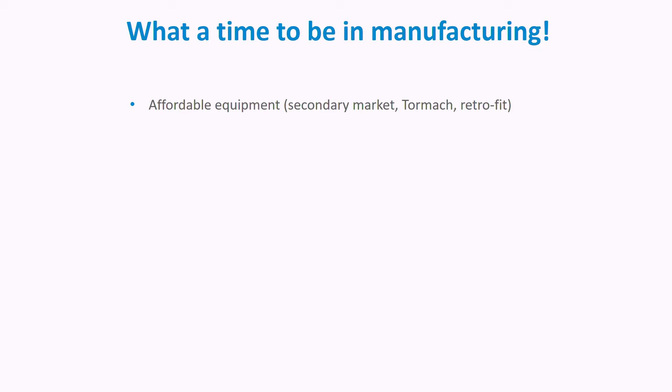I don't believe there's ever been a better time to be in manufacturing, personally. The cost of equipment has come down dramatically over the last 10 years. Used equipment can be had for less than the price of a new car. You can buy a brand new machine for the price of a new truck. Haas makes some really great entry machines. Retrofits, Tormach, Syil, all these different small companies are popping up offering better availability and pricing.

The same thing goes for tooling. It seems like every other day a new cutter manufacturer is popping up offering something better for the same price or less. Work holding, tool holding, those have all come down in price.

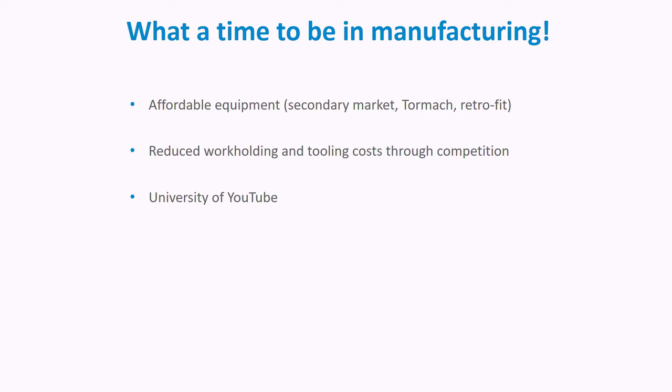University of YouTube. My generation would get out of high school, go into the shop, or go into trade school, get an apprenticeship, and work their way up the ladder. Now we have white collar individuals making the transition into the blue collar world because they have that creativity to make something. You have John Saunders with NYC CNC putting out wonderful videos on Fusion and machining. You have Lars Christensen from Autodesk doing live YouTube streams. So you have no shortage of information, and you can learn something very quickly.

Software. One of the biggest hurdles I experienced when I first wanted to start a shop was I couldn't go out and spend ten grand on Mastercam. I could get a pirated copy, I could go with BobCAD, but legal issues and quality issues made that impossible. I wasn't about to spend my entire savings on a piece of software. So when Autodesk put out their Fusion 360, it was a dream come true for a lot of small shops and people with the desire to do something.

And I certainly took advantage of that. It's free for hobbyists, free for startups, free for students. If you want to buy the version because you don't qualify, it's $300 a year for the basic version. Most people spend more than that on Starbucks in a year, so the $300 is chump change.

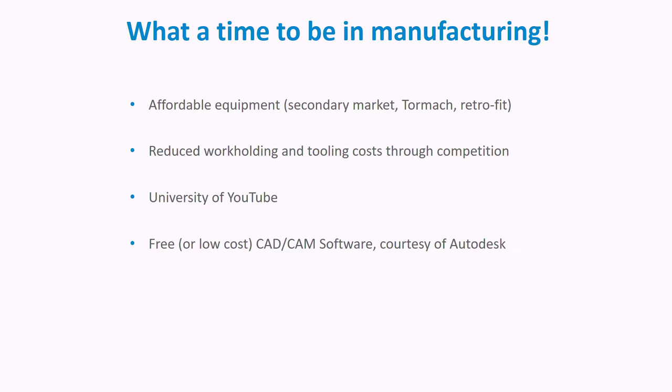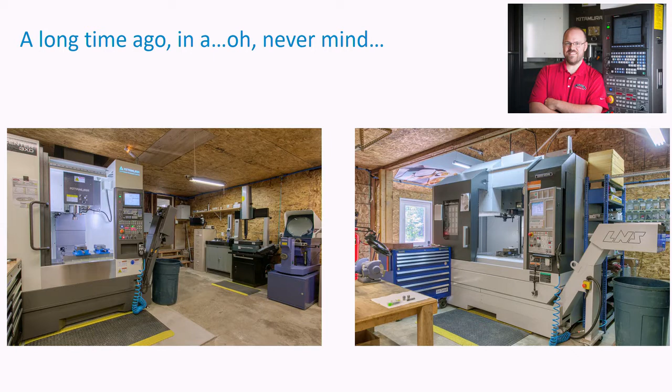Before we get into the meat of the topic, though, I'd like to give you a little bit about myself, where I'm from, to explain why I feel qualified to talk on the issue of quality and integrity. My name is Seth Madore.

I'm from Maine. I've been a machinist for 18 years. I was one of those that got out of high school, went into a shop, pushed brooms, made parts, made junk, made a lot of junk. I ended up getting paired with a couple of old timers who took me under their tobacco-stained wings and showed me the ropes. It was a learning experience.

The shop I was in was very set in their ways. We've done it this way for 50 years. We've got the row of Bridgeports, we've got the manual equipment. They had a couple of CNCs, but they weren't really interested in learning more and doing more. It's the way we've done it, and this way we'll do it.

That didn't sit well with me because I wanted to learn more. I wanted to do more. I wanted to do better. I wasn't so concerned about wages because that would come with time, but I always wanted to be pushing what I knew and how I could do it.

So eventually I ended up moving on to another shop, and that happened a couple of times. Every time I'd peak on what the shop was willing to invest in for technology, I'd be like, time to find something new. So the last 8 years were spent at an aerospace shop in southern Maine, which was literally one of the best aerospace shops in New England.

We had 3, 4, 5-axis, 9-axis machines, EDM. We had all these technologies at our disposal. The owner had this idea that new technology, let's try it. What's going to happen? Okay, we may lose out the first time around, but it'll pay off in the end. And so they were always willing to invest in where things mattered. And it was a really good relationship.

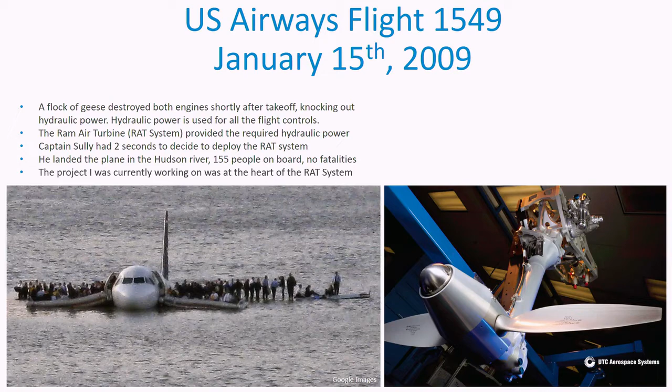If the quality hadn't been held, if someone had just fudged the numbers or didn't take the regard needed, 155 people might not have walked away that day. So where do we start? There is such a wide range of topics to talk about in regards to quality. I say we start at the beginning.

Lighting. Lighting and magnification. I've been in so many shops that are dungeons. You walk in and it's this dimly lit light, all the smoke has colored the lights over the years, and you're like, how can you work? You look at the benches and there's no magnifiers there. Do you know what it's like to take a part with your naked eye and then you put it under a magnifier? You can see so many more flaws just by that simple act.

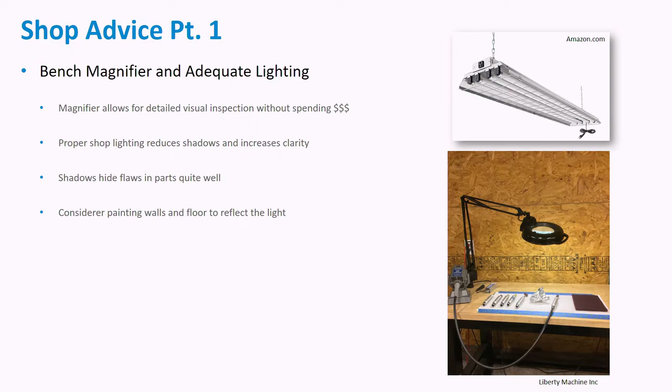And people don't think of doing that because they get focused on the manufacturing side of things, but the actual inspection tends to be an afterthought. So the magnification and lighting. If you're setting up a new shop, I strongly advise painting the walls and the floor. You can see I took my advice very well. I was in a hurry and it's like, I got to get the machine running and I'll paint it later. Well, that was 4 years ago. Eventually, when I move into a new shop, I'll maybe paint it.

Climate control. Machine costs, tooling costs, wage costs, those are real significant expenses. Air conditioning and heat or not. Granted, if you have a 100,000 square foot facility, it's going to cost you a buttload of money to AC that place. But if you're running a small shop, 10,000 square feet, you as a machinist are going to work better when you're not fighting the sweat, when the glasses aren't falling off your face. Your machine is going to thank you because it's not growing 5 thousandths over the temperature range.

When I started, I was like, I got to squeeze 2 nickels together to get a quarter. I'm going to shut off my heat while I'm at work. Well, I spent the first 2 hours every night trying to get the machine to repeat. So suck up the money. It's short money. Get your shop climate controlled. Your employees are going to thank you. You're going to work better. Everything is going to be better if you can remove that one more variable.

Now, my talk is not going to be, you do all these things and you're going to be making good parts. This is a discussion of closing all the doors. You start a project and you have all these doors that are open and each one leads to failure. And so what variable can we remove that closes out one more chance of failure? This is simple. Don't fight the temperature.

And on top of that, there are new machines now, like Pratt & Whitney's dealing with it down in North Berwick, Maine. They just bought like 50 DMG Moris, beautiful machines. They don't have AC, and their shop gets up to about 110, 115 degrees in the summer. The machines shut off. And so for 4 hours, the guys are doing this because their machines can't run.

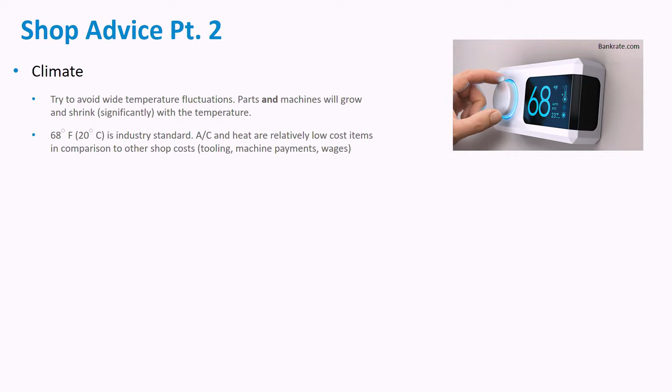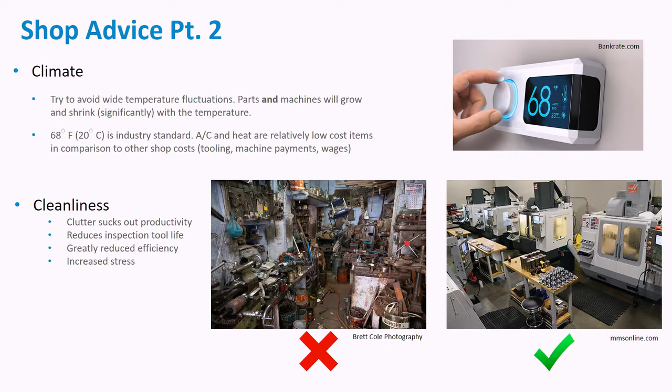Buy once and cry once. No one wants to spend money, and that's true. I mean, I need to be putting as much money back into the bank as I can. I don't want to be buying extra things. And when I'm faced with the chance of buying product A for cheap, product B for expensive, I want to go with the cheap. Problem is that I did that a lot in the beginning, and it would fail halfway through a job, or it wouldn't last me till the next job.

So if you buy the quality item, I'm not talking about buying the orange vises because those are $2,000, but get a good Kurt vise, that's $400. You can get a Jergens or a Glacern machine for $300, but you don't save anything really because the quality isn't there. And the quality item is going to last the life of your career. The shop I came from had vises from the 70s because they clean them, they maintain them, and inspection equipment as well. Buy the quality. Shars is not quality.

Use the right tool for the job. I've seen this on Instagram, someone checking a thread with a bolt. Bolts aren't made to check parts. If you're making a fixture, it works. But get a thread gauge, get a ring gauge. There are specific tools for a specific reason. It's not because people just want to sell you more stuff.

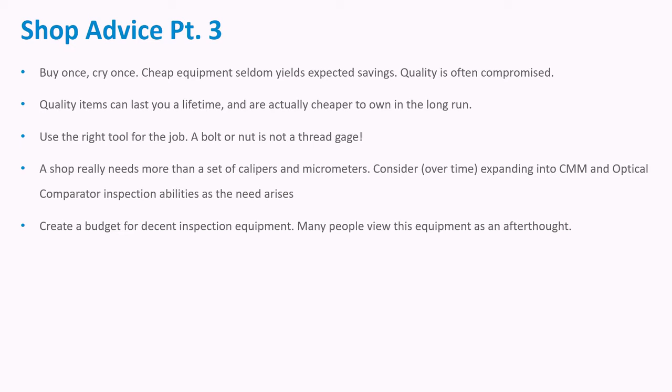Creating a budget. This dovetails into what I was just talking about. A lot of people view it as extra, as overhead. But if you can verify your part easily, you can get a 2-point telescoping bore gauge to measure a bore. You can also get a nice Starrett tri-mic that's digital, and there you go. It's a lot quicker and a lot more accurate. Get the ring gauge to go with it. Create the budget.

Calibrating the equipment. Some people that I know that have the CMMs and the comparators, they bought them a decade ago. Well, when was the last time it was calibrated? Time and gravity tend to do things, to people even. So calibrate your equipment, maintain your equipment, do preventive maintenance, keep logs. When was the last time I changed the filter on my air compressor? Why is my air compressor making that noise? Why is my machine making that noise? When was the last time you serviced it?

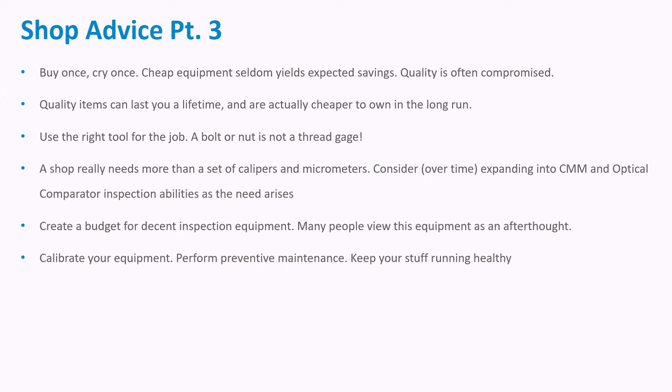Probing. So when people are contemplating new equipment, they tend to be like, I need to spend as little as possible. Look, you're already spending 40, 50 grand or more. Tack on another 4 or 5 grand. Probing is one of the most beautiful things to have as a machinist. All the shops I came from prior to my last one, we didn't have probing. So you learned how to do everything good with indicators, and you became, not to sound weird, but you became intimate with the machine. You knew if it sat for X amount of time, it would grow, and you just became a lot more of a machinist. And so at my last job, they started adopting probing, and I'm like, I don't need that, I'm a machinist. Probing's for wimps. So now that I own 2 machines, they both have probes. It's a no-brainer.

It allows you to do so much more with less. I think we kind of heard that in the keynote the other day. So you can run your machine and not have to worry about thermal growth. If you set up 5 stations in your machine, op 1, 2, 3, 4, and 5, you're going to load 3 into 2 and 1 into 5. No, I'm a machinist, and I've done it. I've crashed stuff. Just because you're trying to do 5, 6, 7 things at once, you're going to get distracted.

The probing, properly programmed, will prevent that. It also works to check for: did you remove the vise handle? Probe. Yep, you removed the vise handle. Good to go. Did you load the part backwards? Nope, part's loaded properly. Did you back off the tailstock? So you can do all these checks with the probing that will save you. The spindle on my Mori is 24 grand to replace. I can't justify not doing it.

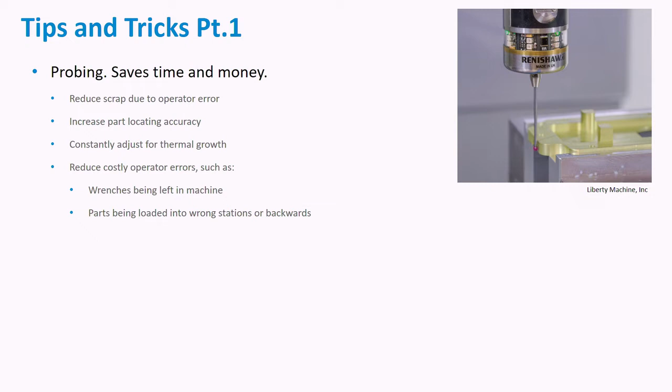Tool probing, same deal, only on a lesser scale. This one helps to speed up setups. It also assists in broken tool detection. I do a lot of small tooling, 30 thou end mills, 20 thou end mills. If it breaks, I'm going to clear out 5 other tools after that. And I really don't want to do that because I'm cheap. Each tool costs money and time. And so I can have an M0 where the tool's still there, good to go. Well, then the machine's sitting for the duration.

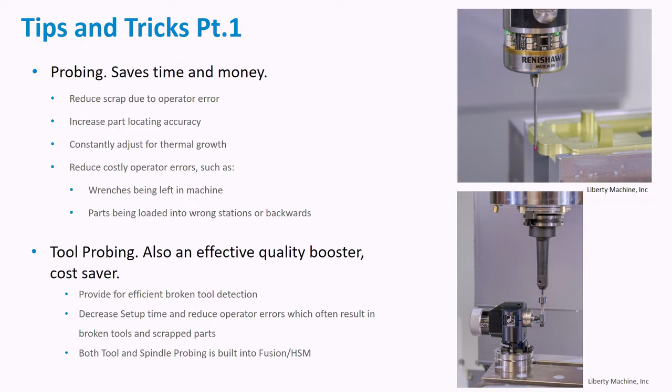The tool probe just automates that. So tool probing and spindle probing is built right into HSM, Inventor, as well as Fusion 360. Sometimes you do need to do a slight post modification, but it's typically not too big of a deal. So I just mentioned 20 and 30 thou end mills. Well, indicate your tools. If you have a finish end mill that you need to hold an accurate size, or you have a small diameter tool, you need to indicate it.

We don't all have the luxury of shrink fit or hydraulic holders. We're left with the ERs, collets, and the TGs and the SKs. In theory, they should be perfectly concentric because that's what they advertise. Well, it's not. You may luck out and this is just a perfect marriage. Everything's good to go. Other times, if you bought that cheap collet set that was half the price of the Parlec, you may have 5 tenths to a thou runout just because of how it collapses. So indicate your tooling. That's really important. The smaller the tool, the more important it becomes.

I did a study once just to prove a point to a coworker. Load the tool, don't indicate it, run it. The tool broke in 10 parts. It was just doing a little O-ring groove. Indicate the tool, same material, 35 parts. So indicating your tool matters.

To indicate your tool, you want to use a magnetic base with a good tenths indicator, put it up against the flute, turn it backwards. If you turn it forwards, you can often chip out the tool. So turn it backwards, find the high spot, back the indicator away. On a small tool, you want to put your finger up behind the tool, little piece of brass, and tap it right on the nut. If you have the indicator there, it will shock the indicator. And if your finger's not there, a small tool will typically just break right off.

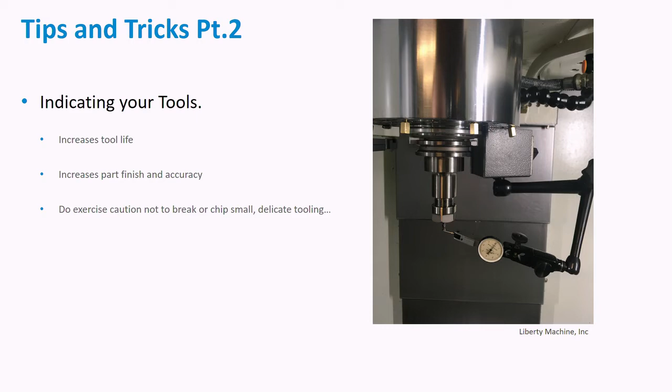I did it once. Shoot, where'd my tool go? It's a bad thing to say to your boss: hey, you know that $100 oil hole drill that you just bought me? Yeah, I need another one. They tend to frown on that.

Torque wrenches. Yeah, there's a few up there. So those are the torque wrenches that I use, and I want to show you the key places where I use them. We have them to tighten the vise, we have them to tighten the jaws, and we got them to tighten fixture bolts. Using a torque wrench reduces wear on components. It reduces the destruction of the threads. If you've been in a machine shop, we've all probably worked with the gorilla, who's like, yeah, I gotta tighten it more. Well, it prevents that.

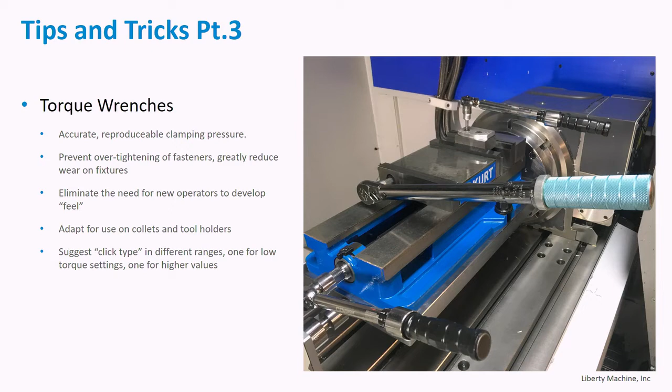How do you communicate to someone? Well, tighten the vise this much. No, this much. There's no numerical value tied to that. With a torque wrench, you can record the value in the program or in your documentation. Last time we ran this job, we held it down to 400 inch-pounds, 100 inch-pounds. I've done parts down to 20 thousandths thick, quite large parts. Literally 10 inch-pounds, which is just finger tight on the nut. But I needed to have a numerical value. So the torque wrench reduces wear, improves quality.

Print reviewing. The devil is really in the details in this one. We get the print, our numbers are there, we're good to go. Well, what is this spec being called out here? They're calling out this coating spec. What does that mean? What are they looking for? Are there notes somewhere else in another document that control more on the print than you realize?

I've got one customer, they'll just put numbers on the print, and then they'll say refer to 99,000. Go to 99,000, okay. If the dimension is this, this is the tolerance. And so you got to become really intimate with more than what's just on the print. Granted, if you're doing your own product, that doesn't matter so much. The title blocks and then the rev changes. That's one that's caught me a few times.

Hey Seth, this part's coming back again. Oh good, load the program, good to go. Halfway through the job, oh darn, they just went from rev B to rev C. And they didn't note it anywhere else except right up there. And what is this? Oh, it's not even shown up there. You got to go to another document that they forgot to email you. And it's somewhat embarrassing to say, yeah, oops, sorry about that.

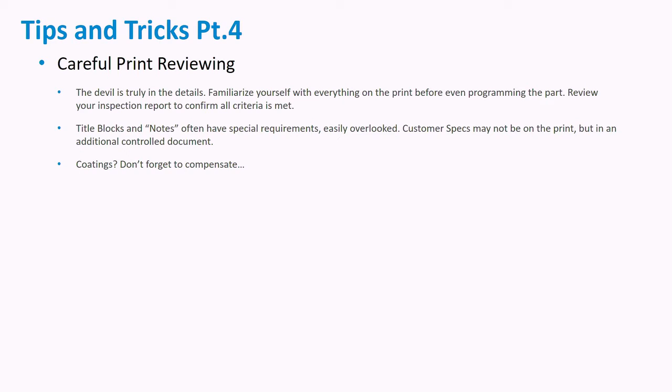Planning. If you have the ability to set up multiple operations on your machine, I suggest doing it. One case in point, let's say you're drilling a hole and you want to intersect it later on, and you don't have the tools necessary to check the depth. Set up both operations. Make sure that your numbers are coming out right and you've gone where you expect to go.

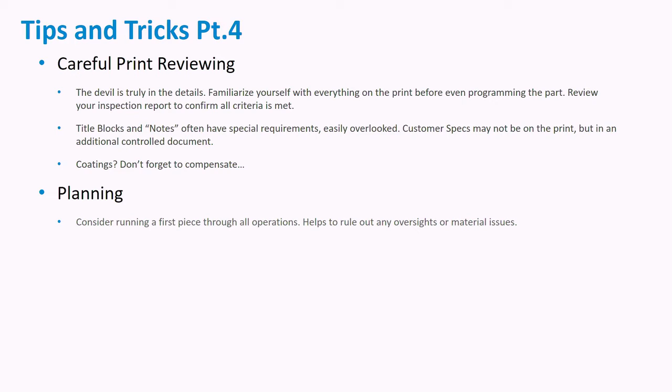Deburring, packaging, and handling. So this is a tough spot for some people. I see a lot of pictures on Instagram with a box of finished parts. They're anodized, they've been beautifully machined, but they're all just clumped together. Every single one of those parts now likely has a scratch on it. You've got a male thread bouncing against a part. Now that thread gauge probably isn't going to go. Parts need to be treated with respect.

Again, if you're making your product, that's a whole separate issue. I'm speaking more to the job shop where you have another customer looking at your parts. Treat your parts with respect. Egg cartons are super cheap. They're renewable. There's no reason not to keep your parts separated.

Deburring, you need more than a file and a belt sander. There are beautiful products out there like Foredom hand pieces, 3M bristle discs. There are all these different tools out there that can give you a very nice deburred edge. It does involve a secondary operation, but typically they do anyway. Deburr as much as you can in the machine. It's worth the machine time to have consistency.

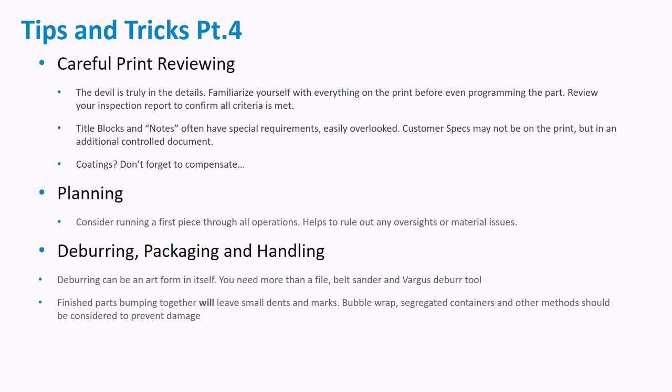Fail fast and fail cheap. You've got a big project. Oh, I stole that line from my friend John Saunders. He okayed that. So fail fast and fail cheap. If you're looking at a big project, prove the process. Prove that the material isn't going to grow.

This ties back into my last shop. We would commit to something, this is how we're going to do it. Well, it didn't quite work that way. So run a part, prove it through all the operations, see what the material does. Make sure everything is good to go. Don't stay married to the process.

For all the good things I can say about that company, that was their one thing: this is the process. The part didn't change on screen. Esprit didn't show chatter. Esprit didn't show shrinkage. Well, real life, the tooling didn't agree. The work holding didn't agree. The machinist didn't agree. Fail fast, fail cheap. Prove it's going to work. And don't stay married to the process.

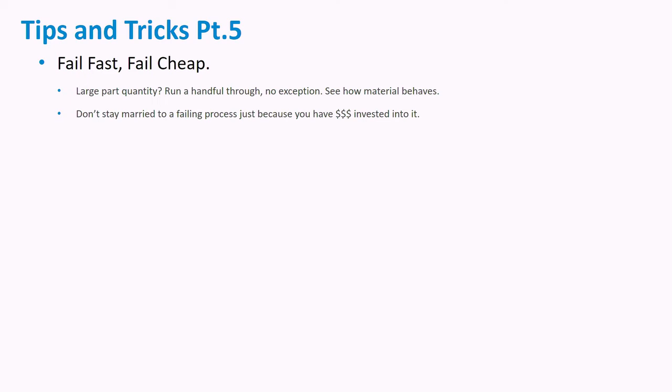Okay, you've got 3 weeks into the fixturing and it's not working. Be willing to ditch it and try another thing. Don't commit that much time to it.

Process reliability. If you're a machine shop trying to compete against China, Mexico, or the job shops that have 30 Brother machines in a row, cycle time matters.

I totally get that. I have 30 things to do in a day: order the material, order the tooling, quote the job, program the job, inspect the part, say hi to the wife, say hi to the kids, answer emails, all these other things.

If my machine takes 3 minutes longer to run, I don't care. If it takes 15 minutes longer, I don't care, because I've got something else to do that I need to do anyway. So I either can diversify my time and maximize my efficiency, or I can stay in front of a machine with a 30-second cycle time.

All these other things are just sitting. And so the wife and the kids get to suffer because I get to come home and do all these other things that I should have done during the day. So cycle time is my friend.

I don't want to say that cycle time doesn't matter. Obviously, if you've got a job that's an hour and a half long and you found a way to bring it down to 15 minutes, do that.

But if adding an extra tool adds 20 seconds to your cycle time, or it saves the process, you've got a tiny aught-80 thread to put in. That's tiny - thread mill it. A tap broke, you've lost a $50, $100 part. Thread mill it, it'll last forever. It's going to take 30 seconds of your time.

Obviously, if you've got 150 tapped holes to do, that may not be the best answer. So don't be so concerned about chasing out the cycle time. Process reliability is where it's at.

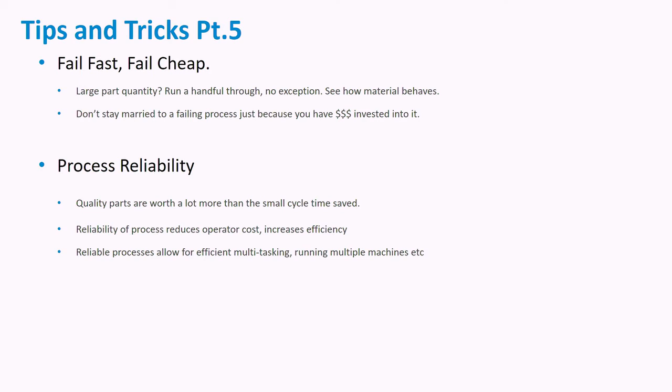Networking - if you don't know how to do something, ask. Instagram, social media, Facebook, Practical Machinist. There are many people just willing to share information and talk to you. Hey, how did you do that?

I put one part up on Instagram a week ago, and I got 3 or 4 emails - hey, how'd you make that feature? Here's how you do it. I don't have any secrets to hide.

The machining world is very large, and we don't have enough of them. I want to help out the next machinist to make the same part. Competition, I'm not concerned about that. There is so much work to be had.

Aerospace, oil and gas - yes, oil and gas is busy. Car manufacturing to a little extent. Firearms. There's so many different segments and there's so much work. I'm turning work away, so I'm not concerned about the competition. I'll tell you anything I'm doing.

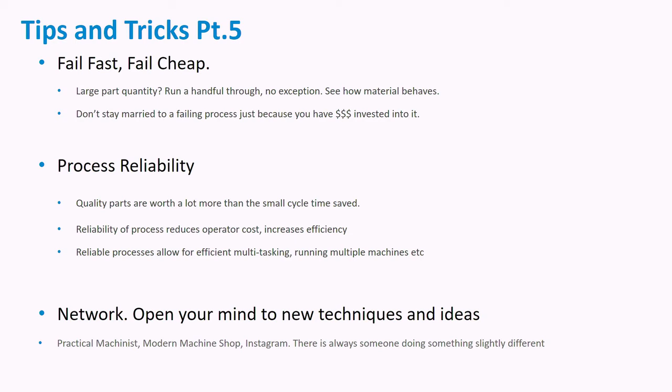Documentation. It sounds boring, but it's very important. How did you run the part last time? You ran it 6 months ago. How did you hold it? What did you use for tools?

Now, Autodesk does have a built-in setup sheet. They apparently also have a thing against trees because it prints out on 7 pages of paper for like 2 tools. So I worked with an Autodesk employee, George Roberts, swell guy, and we got together. We took the OEM setup sheet and made a macro that populated this 1-page setup sheet.

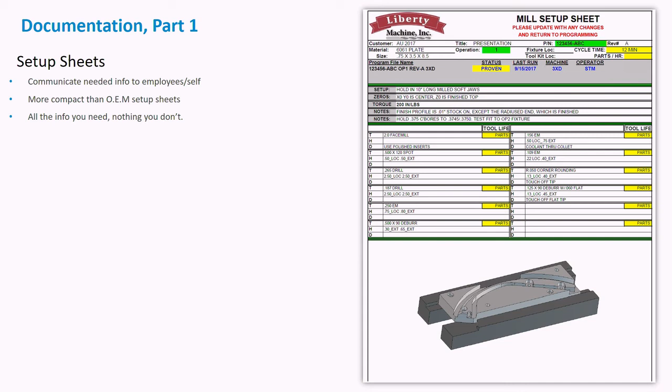So I just have all my tools, how I held them, what the extensions were, and I was able to capture a picture of the part. A lot of this stuff is automatically populated. It's still a work in progress - I'd like to get more data into there, but it works really well. I gained permission from my past employer to use this template. That's actually the truth.

CNC programs. So you've got 1,400 programs in your machine. Did you run it? Is it a good program? How do you know it's a good program?

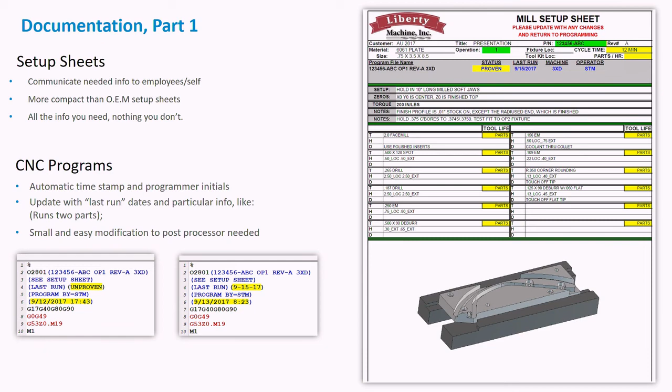So in my unproven job folder, I've got this. Oh, I made a new one, and here are some changes to it. So it allows me to know that this is the one that ran good last time. So all I got to do now is set up my tools, touch them off, and I'm pretty certain I'm going to be good to go. Small modification required.

Inspection reports. How does your customer know you're checking your parts? Did you document it? How do you know your employees are checking your parts? They need to be recording dimensions. Without recording dimensions, it's just 'it's good, I checked it.' Did you check it? How did you check it?

So did you use your microheight? Did you use the CMM? What'd you do? So this is something that you want to set up before your job is started, hopefully. I don't always get to do that. Sometimes it's go, go, go, go, go. Oh, I got to make an inspection sheet. It helps for me that one of my customers actually requires it, so I had to do it. I can see the temptation not to do it because it does take time, and time is money.

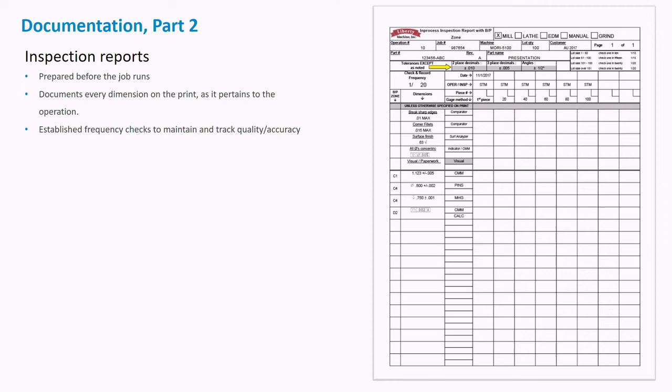Scrap parts. Nothing's worse than getting a call from the customer saying, yeah, we found a junk part, and now we got to look at all other 150 parts. If you scrap a part, sometimes it's easy - oh, it's missing half the features because it got sucked out of the vise. But sometimes you got a hole that's a tenth oversized.

Identify it. Tag it immediately. Red paint marker, scrap tags. RyanQC.com, they sell them. It's like $60 for like 300 of them. I hope not to ever go through that many.

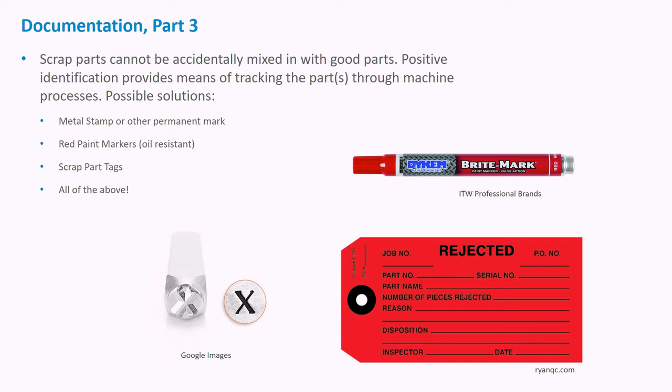Metal stamps. So identify the scrap. You still need to be able to use it for future setups and for next time the job comes around. But identify the scrap, because the last thing you want to hear from a customer is, found a junk part that you knew there was a junk part, and it somehow got mixed up on the bench. Tag it, identify it immediately.

Integrity. This is a tough one. I don't want to come across like I'm preaching, like I'm sitting up on my soapbox saying I'm better than you.

The first shop I was at - let me back up a bit. Your job as the employee, or the shop owner, is to provide value. You need to generate income for your employer. You need to generate success for your customer. Yes, we make money in turn, but there's always that person above us that has to make out better than us.

You're the second set of eyes on your project. If you've got a print in front of you and you've reviewed it, if there's something that looks off, ask about it. Don't just assume that, well, the engineer knew what he was doing, I'm just going to make the part. Let me give you an example.

The first shop I was at, the one that was a row of Bridgeports, I had eventually worked my way onto the engineering department, the programming department. We did have 2 small CNCs. And I had this slew of prints in front of me. It was from the AutoCAD days. I think it was on revision 6. It was a little bit old.